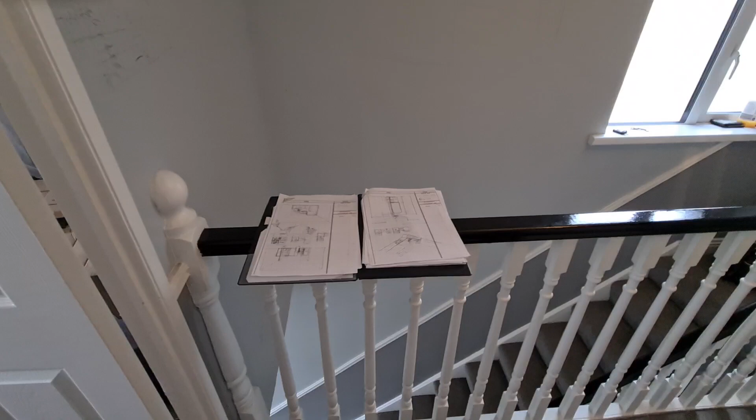I just wanted to show what the first day on a job is for me. When I first look at a job, we specialise in doing jobs that people say can't be done. Either they can't figure out how to get a staircase up or how to make the space that we're looking for without destroying the house below. These are the two jobs we're on at the moment. This is the house we're standing at the moment.

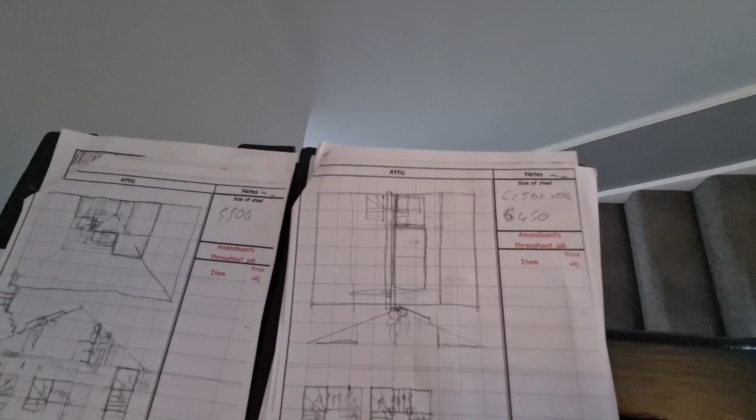So when I first looked at the job, I get the footprint, figure out roughly what way the stairs is going to go, so as I can then tell, once I know everything fundamentally is going to work out, it just needs fine tuning. It'll take me a while to figure that out, and then I can spend the day fine tuning when I finally get here.

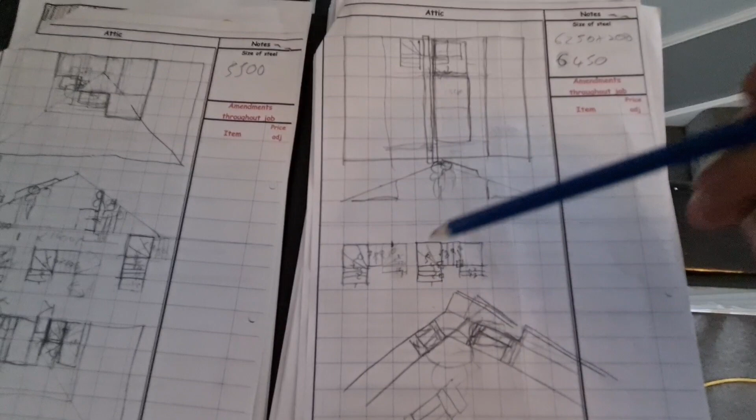So for this house, for example, once I figured out the exact shape of the stairs, either way the stairs is the same shape, it's just different, and then the final product is actually a little bit different again, but fundamentally the bottom does what it's supposed to do, the top does what it's supposed to do, and the middle doesn't screw anything up in the meantime.

I measure up the size for the steels when I'm first on the job as well, assuming I get the job, because I get most of the jobs I look at, so I can have the steels ready to go as soon as I arrive on site.

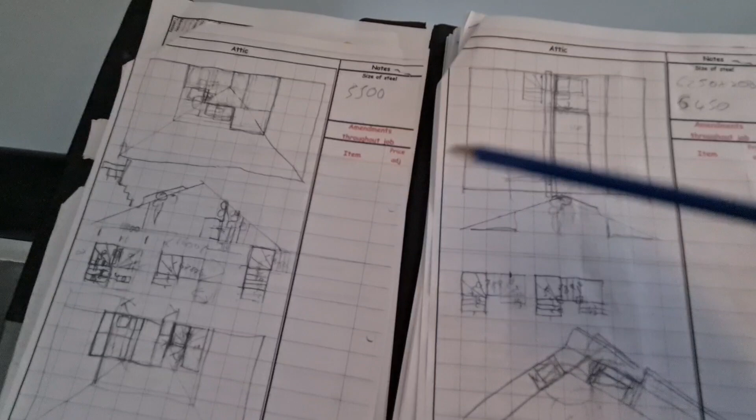So both of these jobs, people were told they can't be done, and then we're getting a fine bit of space in the jobs. Now this one, because it's so low, so on this job here, for example, that's me walking around in the attic. Where a Velux window goes, you get extra head space, so instead of your head stopping here, you can walk out further. It's an extra 400 millimeters of walking space.

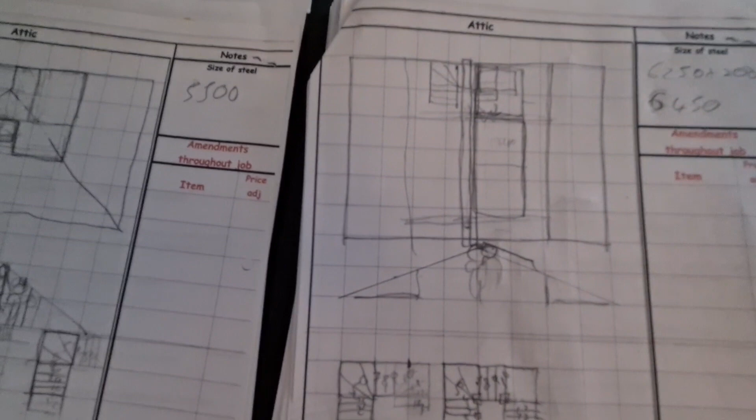In this job here, the only extra walking space we're going to get in the attic is from where a Velux window goes, and we're doing some crazy stuff to get the Velux window way higher in the roof than you normally would be able to.

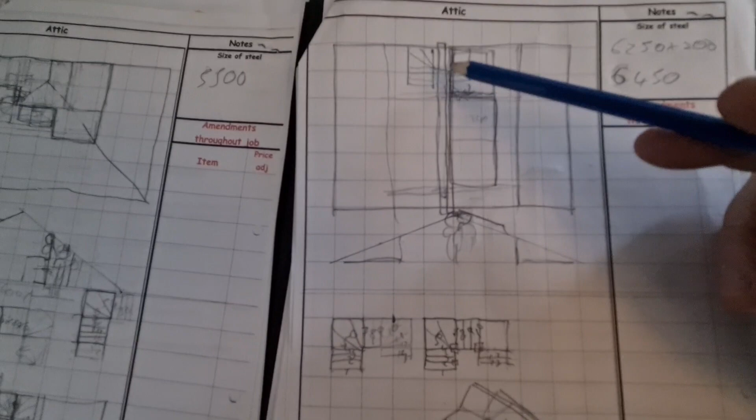And then what we're doing also is we're putting 3 of the biggest windows that Velux make all connected together, so you get the extra head space continuously across the attic, so we get to the top of the stairs with good head space and be able to walk through and still have a decent usable room with lots of floor space in a house that they were told they couldn't have an attic conversion.

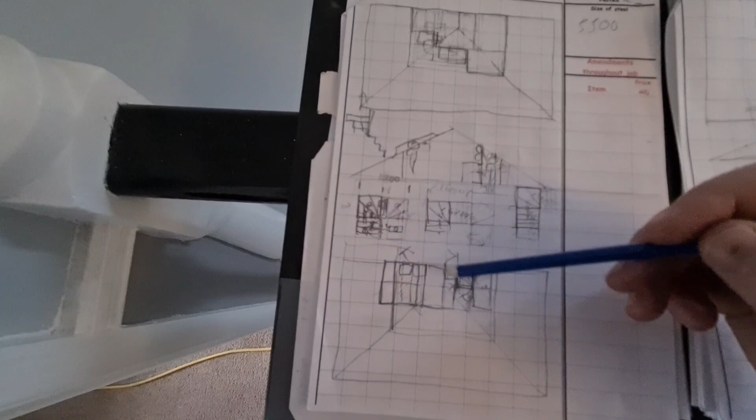Likewise, this fella, the layout of the house lent itself to going up the stairs in a very easy way that everybody was looking to do, to give him a very poxy horseshoe-shaped room here that was going to be useless. But then I figured out to get the stairs up so that my stairs is here, so he's left with a double bedroom in this very small hipped roof house, and he's got a double bedroom with fine big windows in it instead of the poxy thing that other people were going to give him.

Right, so on the first day, I spend the whole day fine tuning everything, so each individual step I need to know the height of it, so as I can map out exactly where it's going to land in the house and see if it's going to affect the staircase, or see if the staircase is going to affect the windows or the head heights or anything.

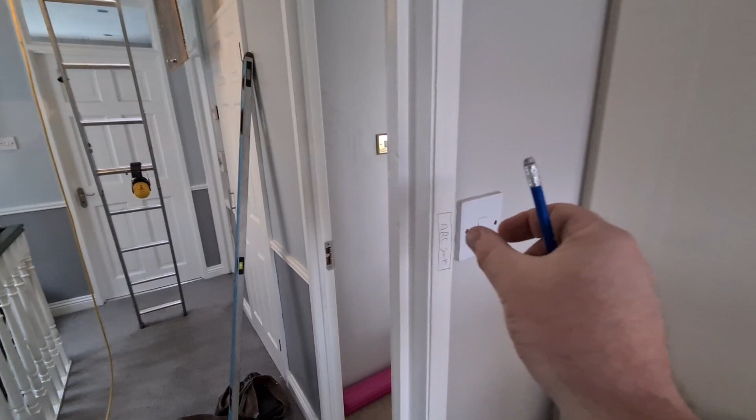And to confirm what I told the customer in the first place, that this wall does not need to be moved out, but this door does need to move down. So I marked exactly how far the doors need to be moved, what needs to happen with the electrics to suit, so the switch has to be changed to the narrow switch and put on the architrave as the door moves down. This master bedroom door needs to move into the room, 320 millimeters in this case, and the switch

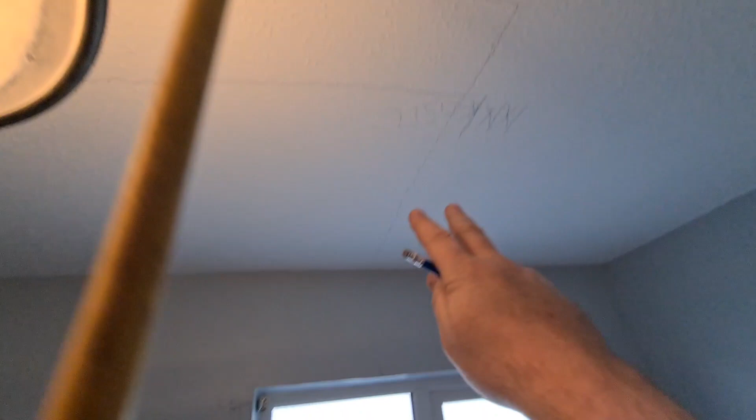stays as it is. Because I have the staircase figured out and ordered now, I can mark the floor joists upstairs, so this is exactly where the floor joists are going to go. That's the last structural floor joist to go up here, and the trimmer where the end of the stairs is over here, that's going to come off the last floor joist across to the gable as the stairs goes up, around and back over our heads here.

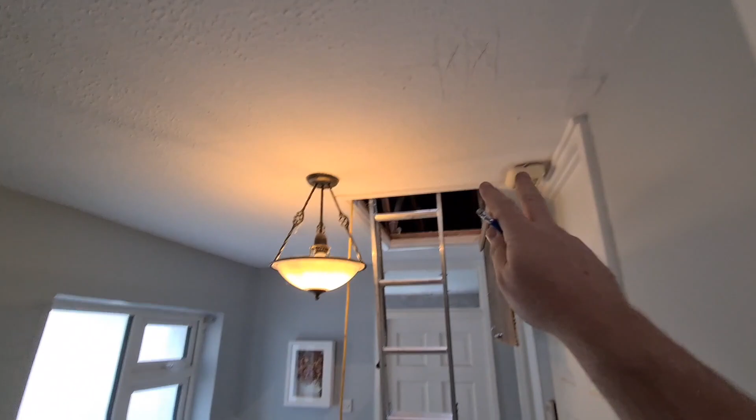So that's everything I do to figure out how everything goes, and as long as my carpenters put the wall where the mark is, put the joists where the marks are, and the joinery makes up the stairs exactly as I've asked them to do it, as my joinery always does, then everything's going to work out perfectly down here.

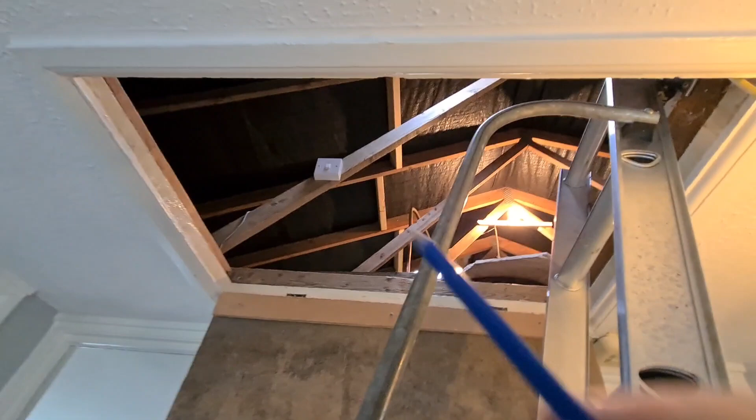And then I do the same up in the attic. We just got here, so nothing in there yet, but I mark out the rafters exactly where the windows are going to go, mark out specifically the size of the windows on the rafters, and again, once the carpenters cut the rafters where I've marked, everything's going to work out perfectly.

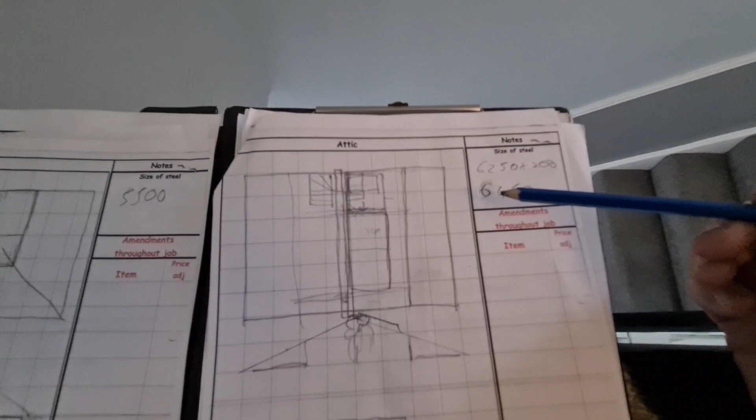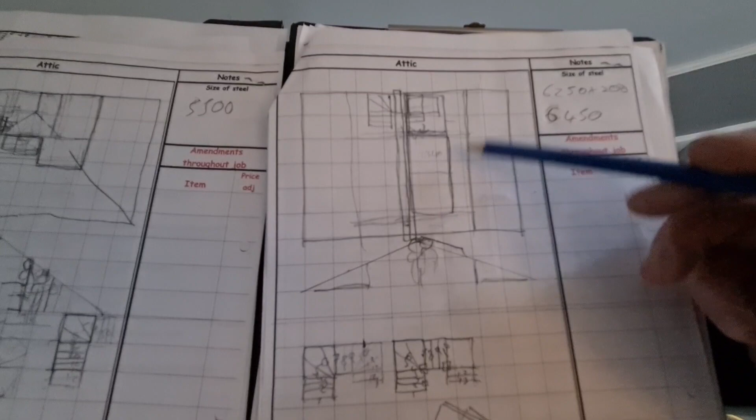Likewise with the steel, I measure the steel when I first look at the job and figure out what size it's going to need to be. Confirm with the engineer so he's happy, and then figure out how wide the room can be so I know where the steels are going to be. In this particular house, it's going to be 1.9 meters off centre for the steels to still give us a decent side wall that you can put a desk up against or a bed and it still be useful.

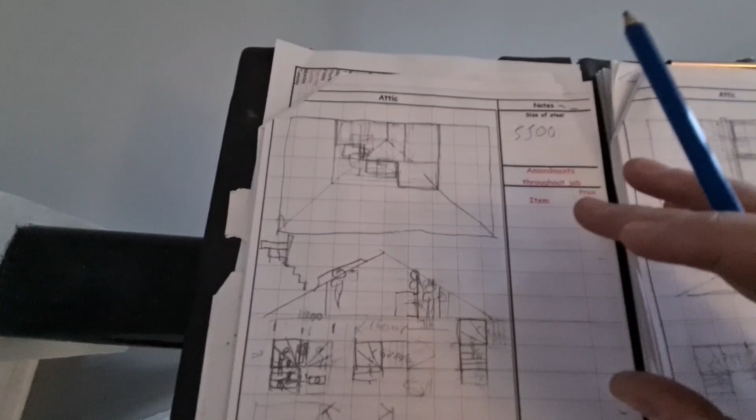And this house was a wider one, so there was 2.4 off centre on each side for the steels to go in here. Now the steels for this one have to be a different shape because they have to go down to the hip. So I figure out all that on the first day looking at the job. Order all the steel to be ready to build into the job as soon as we arrive.

And like that, once we do everything as I've designed and the engineer's okayed, the engineer will come in at the end of the job and sign off that he's happy that we've maintained all the relevant building regulations, all the appropriate head heights, all the fire safety issues, and then he signs off on it.

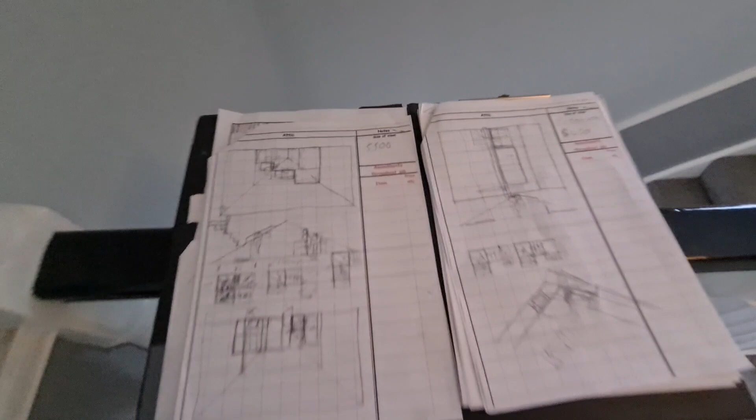That's it. That's what I spend the first full day of any job doing, fine-tuning all the designs I told the customer initially I could do, and making sure I live up to everything that I've promised, which I always do. So after this, the carpenters just do everything to the marks, and they're qualified carpenters, so there's no issue with quality control. They do great work.